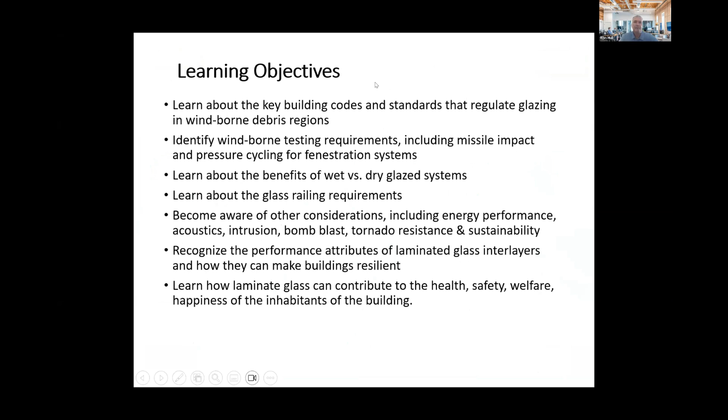The learning objectives today are to learn about the key building codes and standards that regulate glazing in windborne debris regions; identify windborne testing requirements, including small missile impact and pressure cycling in fenestration systems; learn about the benefits of wet versus dry glaze systems; learn about glass railing requirements; become aware of other considerations including energy performance, acoustics, intrusion, bomb blast, tornado resistance, and sustainability; recognize performance attributes of laminated glass interlayers and how they make buildings resilient; and last, learn how laminated glass can contribute to the health, safety, welfare, and happiness of the inhabitants of the building.

Our program topics: first a quick introduction to laminated glass interlayer types. I'm going to go through some building codes, some standards, some hurricane testing requirements, and then talk about wet versus dry glaze systems, and then the other considerations.

Normally during a presentation, I'll pass out these glass samples so you can touch and feel the interlayer. But in general, the PVB is a soft interlayer and the ionoplast is a stiff structural interlayer.

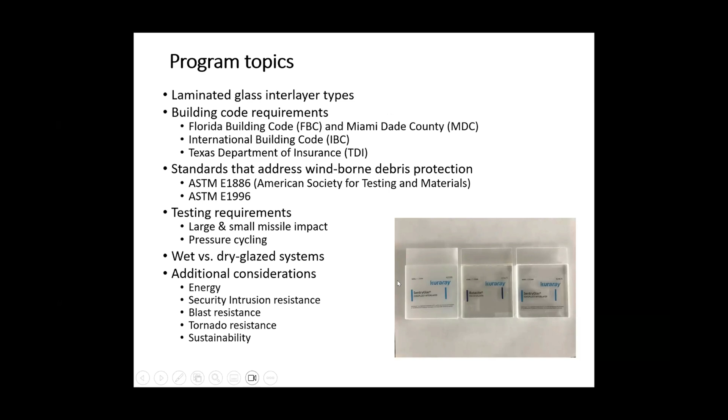There's basically three types of glass. First is annealed, also called float glass. It's great, but when it breaks, it breaks into dangerous shards or splinters, so annealed glass really is not a safety glass.

Tempered glass is a safety glass because it's four times stronger than annealed glass, and when it breaks it breaks into small pieces of glass, so it's less likely to cause injury or cuts. Then there's laminated glass, which can be used with either annealed or tempered glass.

So what is laminated glass? It's simple: it's two or more pieces of glass with an interlayer or a foil, a piece of plastic, in between. The main purpose is to retain the glass fragments to the interlayer if the glass does break, and also to help minimize glass flying related injuries.

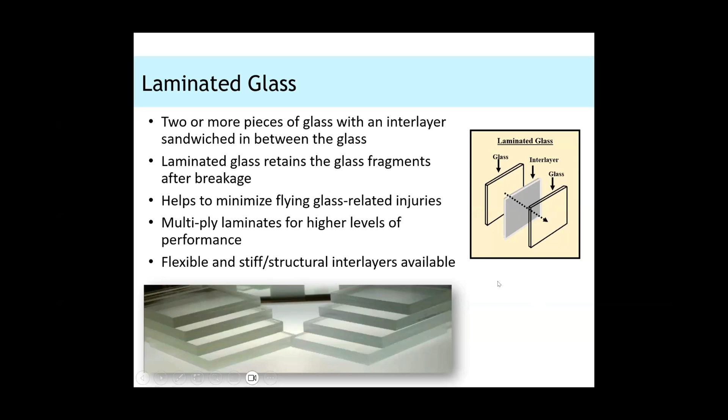Like I mentioned, the interlayers come in both flexible and stiff structural interlayers. The most common interlayer is called polyvinyl butyral, or PVB.

It was first invented in the 1930s for automobile vehicles, because all that was around then was annealed or float glass, which was causing death and injuries during car accidents. So ever since the 1930s, PVB has been inside the glass of a front windshield, and initially all the glass in the vehicle was laminated with PVB.

One advantage of PVB, besides the safety aspect, is it blocks 99% of UV, so your dashboard and carpet won't fade. And then noise reduction: the softer the PVB is, the more sound it will absorb from coming inside the car or inside the building.

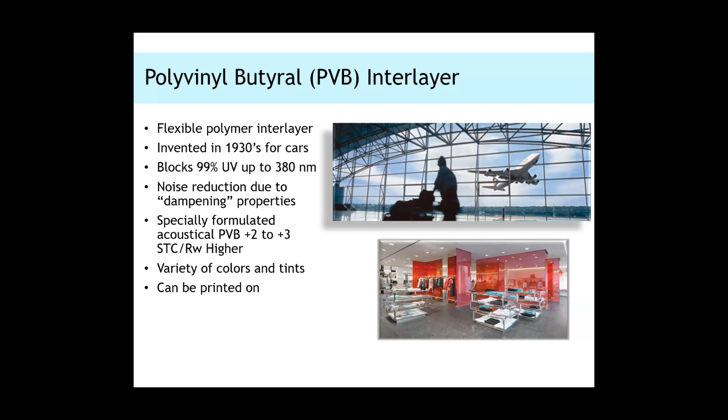In general, just adding PVB to a glass window or door will improve the STC by about 2 decibels. We also have an acoustic PVB that improves the acoustics by 3 decibels in one piece of glass. The PVBs come in different colors and tints, and they can be printed.

Ionoplast was invented in the 1990s, specifically for hurricane windborne debris regions. At the time, PVB was not strong enough to stay in the frame during some of the cycling testing, the high pressure cycling testing.

Ionoplast is 100 times stiffer and 5 times more tear resistant than PVB. It's available in ultra clear and translucent white.

One advantage of it is if the glass has exposed edges to the environment, the Ionoplast weathers very well. We have 25 years of weathering data in Hialeah, Florida, where the edges still look great.

It's also good for post-breakage strength, and I'll show a video on that. Like PVB, it blocks 99% of the UV, and then it has excellent properties for the structural glass market.

What's the difference between hurricanes, cyclones, and typhoons? There's really, I couldn't find any differences, but it's just where you are in the world that determines what you call it. If you're in the Americas, we call it hurricanes. If you're in Southeast Asia, India area, you'll call it cyclones, and then I guess you call it typhoons if you're in Western Pacific and China. This year, the reason I'm showing this chart is I gave a presentation in Australia and in China where there are typhoons, and I had to keep changing my terminology from hurricane to typhoon.

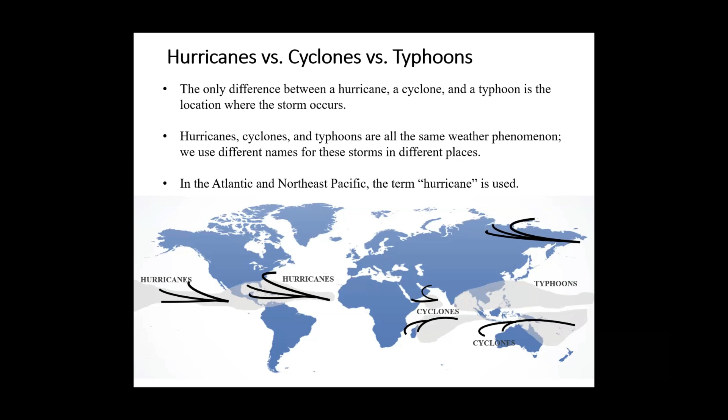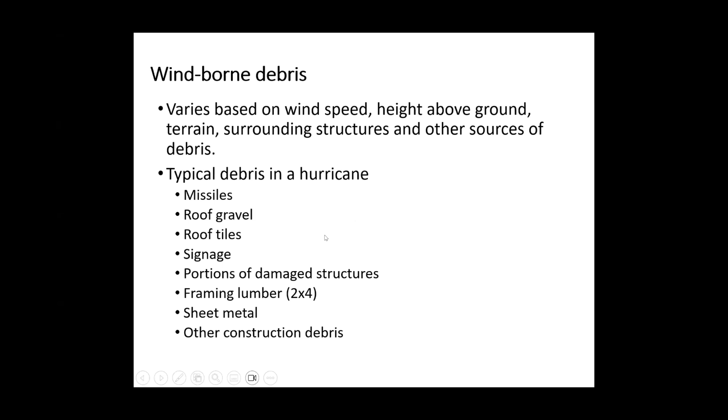What is wind-borne debris? It's really anything that's on the ground or on a building that is light enough to be flying in the air. And I'll show one video.

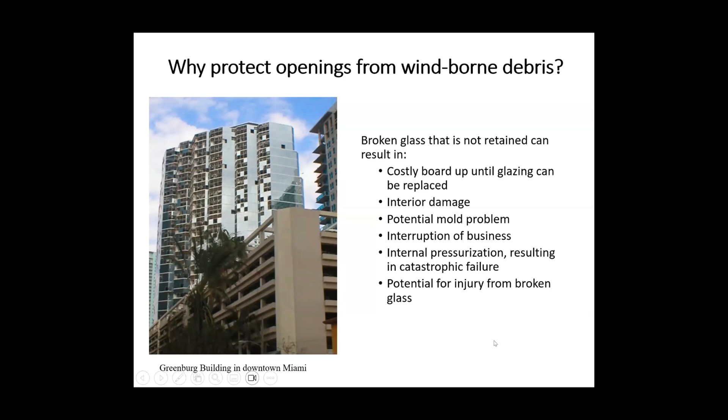So what happens is when you get air and water into the building from a hurricane or a storm, first of all you have water damage in there, which could cause mold. If you're renting the building, you're not going to be able to rent it until it can be renovated. So this is one reason why we have new building codes.

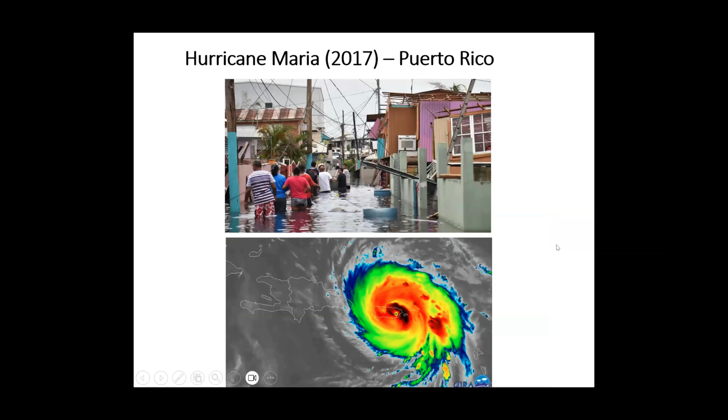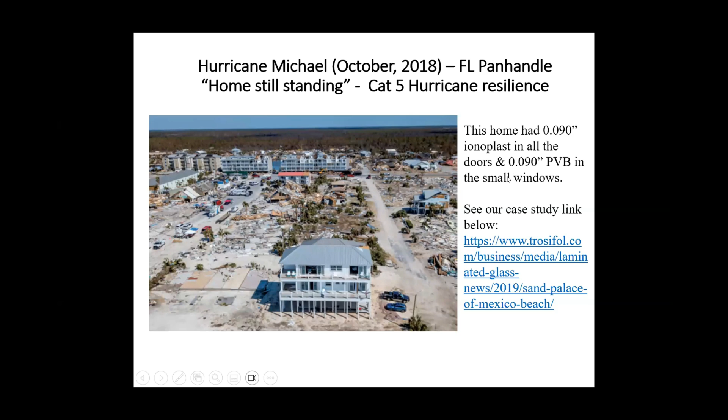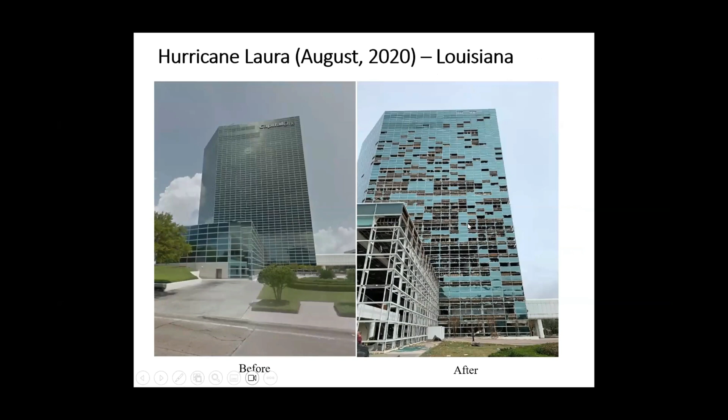Here's one in Louisiana. This on the left is the building before the hurricane, Laura, and on the right is after. You can see that after the hurricane it kind of looked like the building in South Florida from 1992.

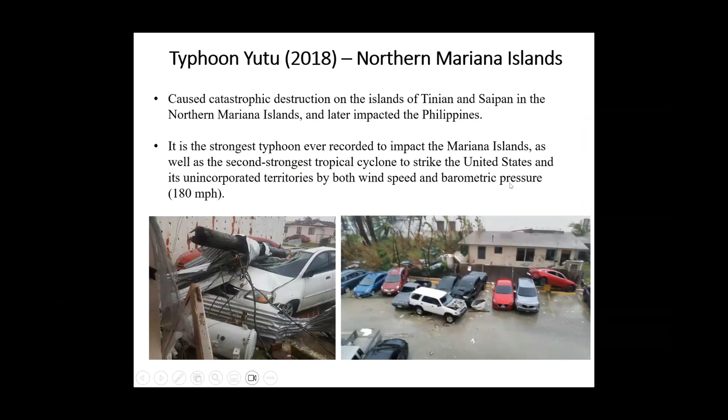Here's some more pictures from that storm.

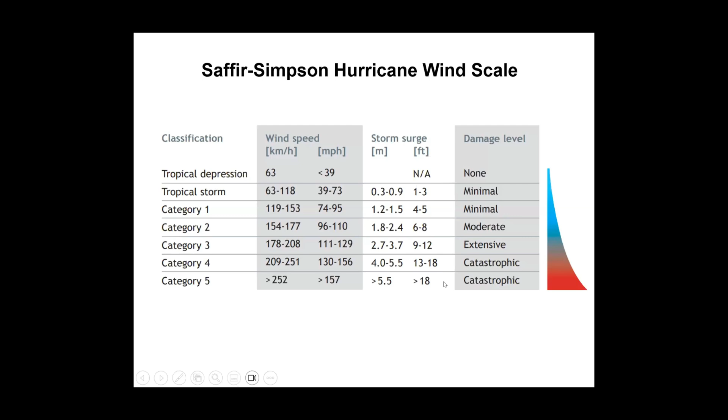Just think that at one time, Milton, which just hit Florida recently on the west side, when it was in the Gulf of Mexico, had sustained winds at one time of 180 miles an hour. So there's actually been talk about adding another category because we're seeing much higher sustained wind speeds than 157 miles an hour. I think what's even more important is you look at the storm surge. There's really no storm surge for a tropical depression, but the storm surge for Category 5 could be greater than 18 feet. And that's really what hit Fort Myers about 2 years ago.

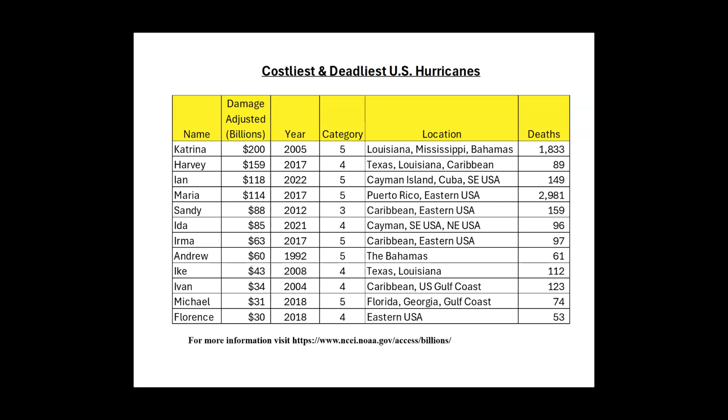And then looking at damage, you had Harvey, Ian, and Maria all well above $100 billion in damage. And then in terms of deaths, Puerto Rico had the most, 2,981 from Maria.

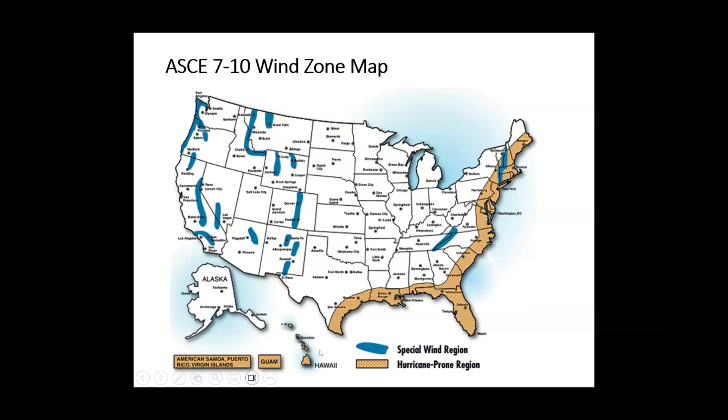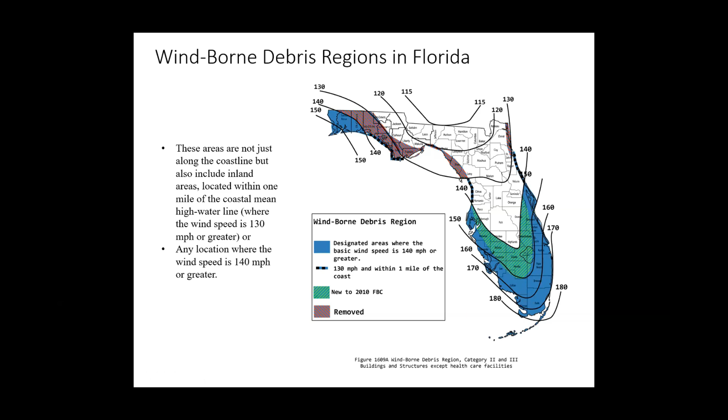And then here's the Florida wind debris regions. As you all know, South Florida has the highest wind zones. And actually if you look far west on this map, the Panhandle, you have some pretty high winds as well. FEMA, who's really involved in the aftermath of the hurricanes, also has their own wind zones, and their category wind zone of 150 miles an hour includes Broward, Martin, Miami-Dade, Monroe, and Palm Beach counties.

Okay, now moving on to building codes. I do see one question - oh yeah, so I forgot to mention that. The building that I showed in Lake Charles, Louisiana, it actually imploded and is no longer there. So thank you, anonymous person, for noting that.

Okay, so in Florida, the main building codes are Miami-Dade and the Florida Building Code. The rest of the world, except for Texas, uses the International Building Code. So if you're in parts of the world where Miami-Dade, Florida, and Texas codes don't apply, the IBC really regulates any area where 130 mile an hour wind zones or higher occur.

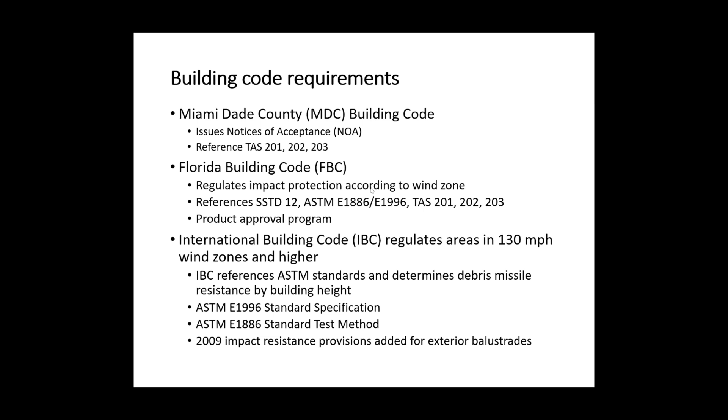So Miami-Dade has its own standards, TAS 201, 202, and 203. Once a product manufacturer has passed all the testing requirements and paperwork, they are issued a Notice of Acceptance, or NOA. Florida Building Code does reference Miami-Dade, but it really uses ASTM standards, E1886 and E1996, and you get a product approval from the FBC instead of an NOA from Miami-Dade.

So Miami-Dade, as I mentioned, TAS 201 is the small and large missile impact testing standard. 202 is air, water, structural testing. And 203 is the cyclic pressure test. Like I mentioned before, you get an NOA once you've passed all the requirements. ASTM 1886 is the test method for hurricanes, and 1996 is the standard specification for performance.

Okay, so what's the difference between TAS and ASTM? Well, TAS definitely, in my opinion, is more difficult to pass, and there's three reasons. One is the large missile impacts the specimen twice, where with ASTM you only have to impact the specimen once. The pass-fail criteria are similar - no penetration or opening larger than 1/16 of an inch by 5 inches. However, ASTM says, or an opening through which a 3-inch sphere can freely pass. And then the other difference is for Miami-Dade, the missile has to impact the mullion, at least one mullion, where for ASTM that's not a requirement.

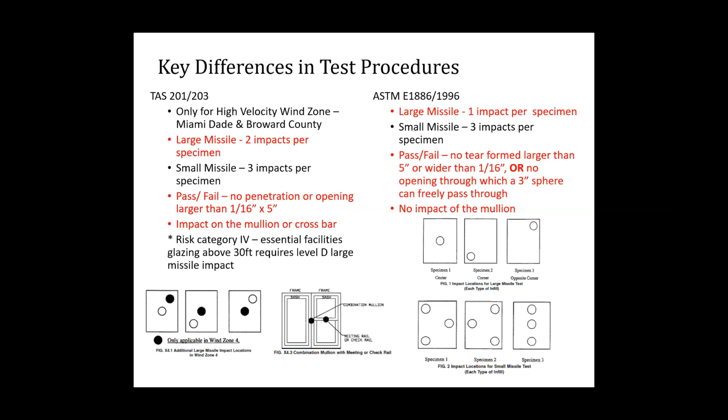So looking at this from ASTM, the first thing to note is the first 30 feet of the building is where you have large missile requirements. That's mainly because a large missile like a 2x4 probably isn't going to fly higher than 30 feet - it may, but it may not. But lighter missiles like gravel or anything lighter may fly higher than 30 feet. So we call that small missile. That's a little background on that.

And then when you're looking at designing a building, you have to look at many things. One is, what wind zone are you in? And what level of the building you're designing to, and whether or not it's an enhanced facility or just basic protection. So for example, if you're in wind zone 4 and you want enhanced protection for essential facilities, the first 30 feet of a building needs to be level E, and I'll cover that in a minute.

And here's some of the buildings that fall under essential facilities: hospitals, healthcare, police stations, emergency shelters, jails, detention centers, etc.

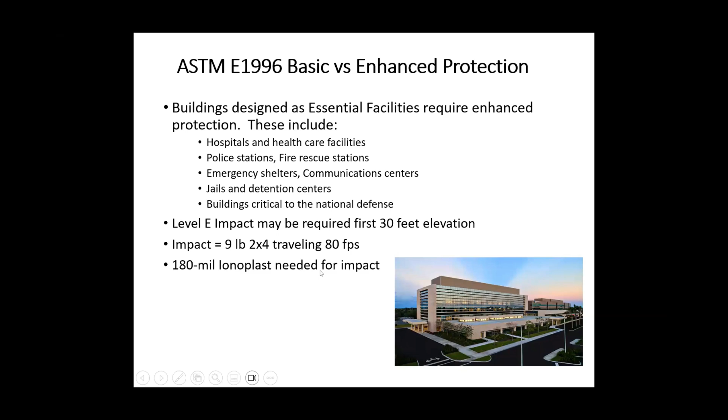I think most people test the first 30 feet of a building to level D, which is a 9-pound 2x4 going at 34 miles per hour. If you're an essential facility, you've got to test level E - same 9-pound 2x4, but the missile is going 55 miles per hour instead of 34.

Once again, this is just general guidance. If your design pressure is 80 PSF or less, and your window or door size is less than 30 square feet, then PVB should work. When your design pressure is higher or your glass sizes get bigger, that's when you need to consider using ionoplast, because the PVB will pull out of the frame during the cycling test.

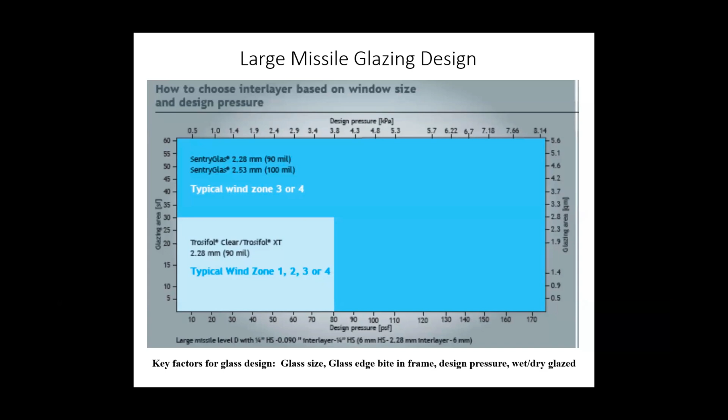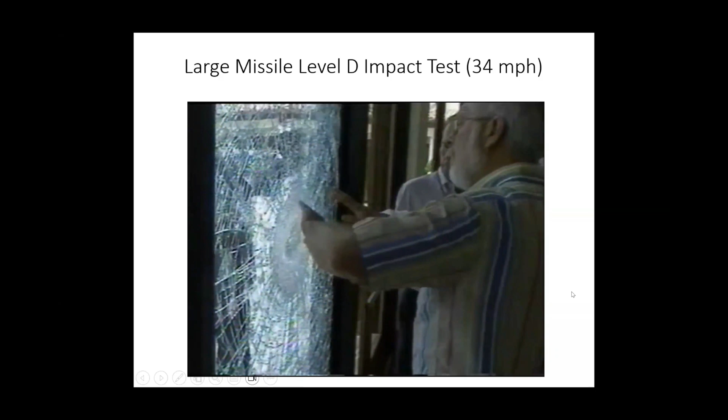Okay, you've probably seen this before, but this is the level D large missile impact test, the 9-pound 2x4 going at 34 miles per hour. The objective is to have really no tear when the glass breaks, and none of the glass comes out of the frame during the impact.

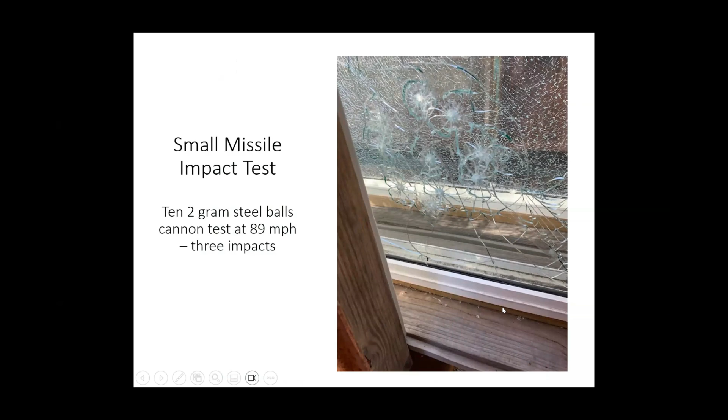Okay, the small missile test is, like I said, 10 2-gram steel balls shot out of a cannon at 89 miles an hour. You do 3 impacts. There's a picture just showing what it looks like after the steel balls hit the glass.

You've got to get with normally an engineering firm to determine what pressures for each of these different cycles. But basically, you've got to cycle the glass 9,000 times and have none of the glass pull out of the frame.

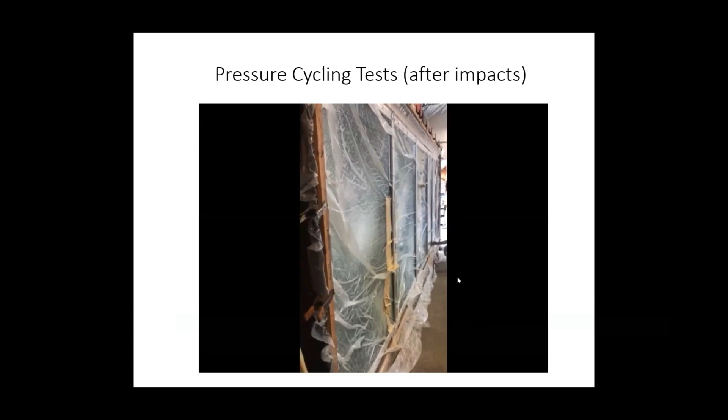So here's a sample of the cycling test. So you have the glass already broken. Now you have the system attached to the wall, and there's a pressure being pulled from the wall, and the glass is deflecting.

So this is FM, Factory Mutual, and ANSI standard 2510 is one of the main standards to look at. FEMA also has a standard for floodproofing, but this is a big trend we're seeing - to have not only a hurricane-resistant system, but also a system that can withstand flooding.

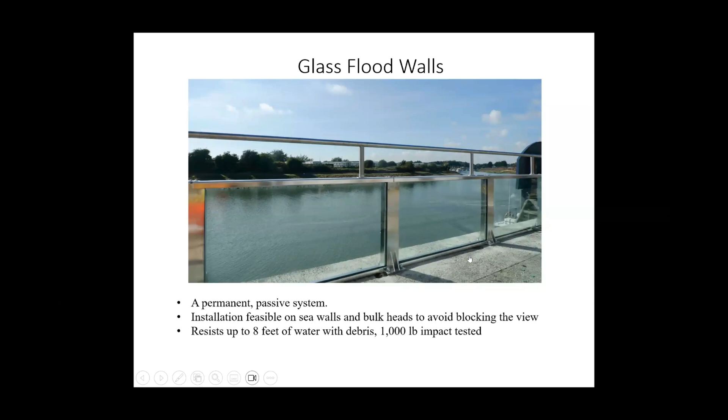So this is an example of a passive system. It actually looks like a glass railing. This is along a river - in the city they installed this. This is actually a flood barrier, where if the river does crest and goes above the ground level, then now you have, instead of sandbags, a permanent structure here to prevent the water from coming farther inland.

Okay, I see a question. Does Broward County still have requirements more stringent than Dade? I don't think so - I think Miami-Dade includes the 3 counties. So, no, I do not believe so. If someone else has some newer information, let me know, but I don't think so.

All right, so for glass railings, very popular in Florida and in the hurricane region - before 2015, all glass railings typically were tempered glass. Because tempered glass sometimes spontaneously breaks, or it might just break from an impact and fall off a building, the International Building Code decided to change the glass railing specifications from tempered to laminate glass. So this all started in 2015 with IBC.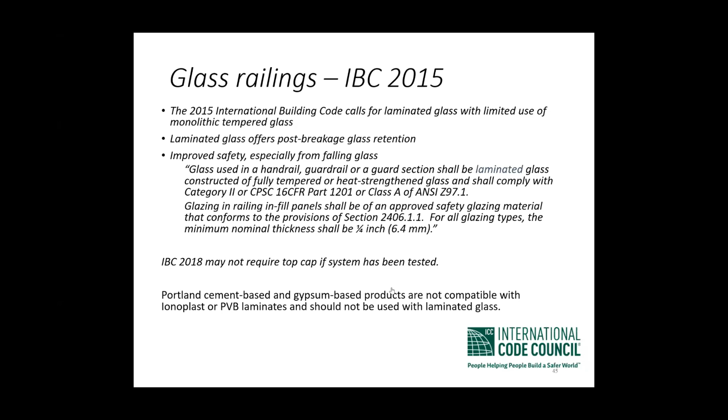So I want to show a quick video. In this video, we're going to show a glass railing, one-side supported, only supported in the base or the shoe. And we're going to test tempered glass with a stick-on film, laminate glass with PVB, and laminate glass with ionoplast.

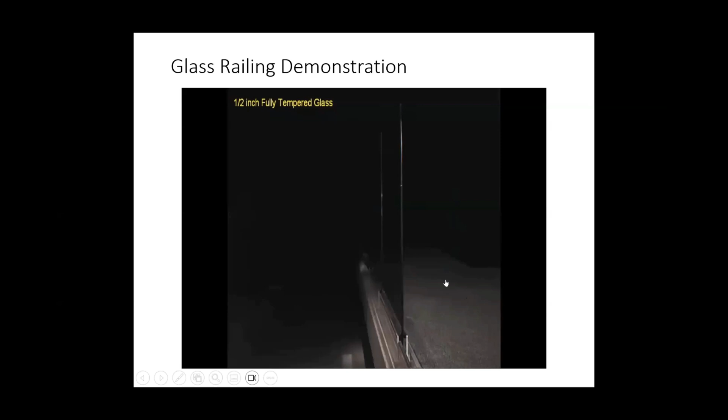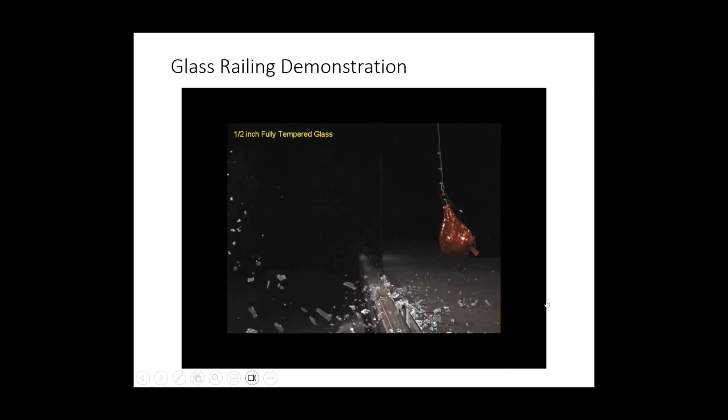So this is tempered glass. This is what tempered glass looks like when it breaks. Here's another angle of the tempered glass. So see, it breaks into small pieces, which is nice.

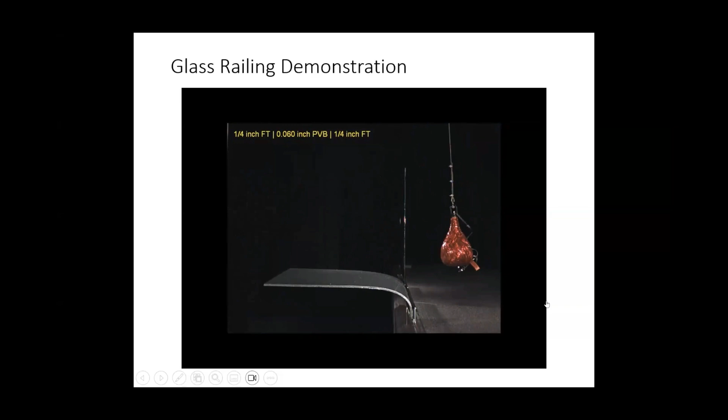Here's an applied film, stick-on film. All it really did here was keep all the glass together. Here's PVB. See, almost no glass falls onto the sidewalk, but the glass falls over like a wet noodle, so if there's a child up there, they could easily fall off. Here's the ionoplast. See, the glass does break, it deflects, but then it just pops back in place, so it can be a barrier until you get the glass replaced.

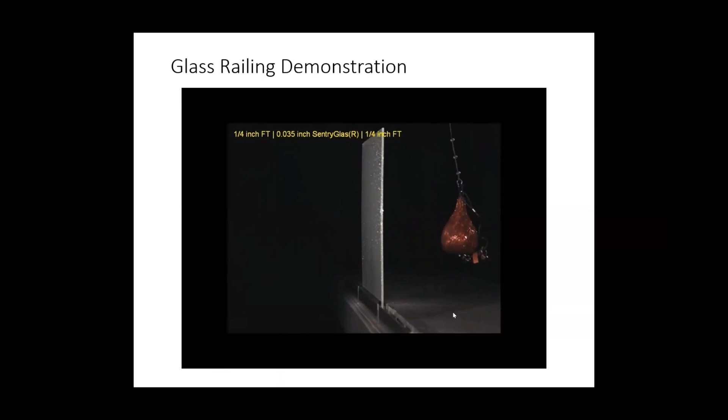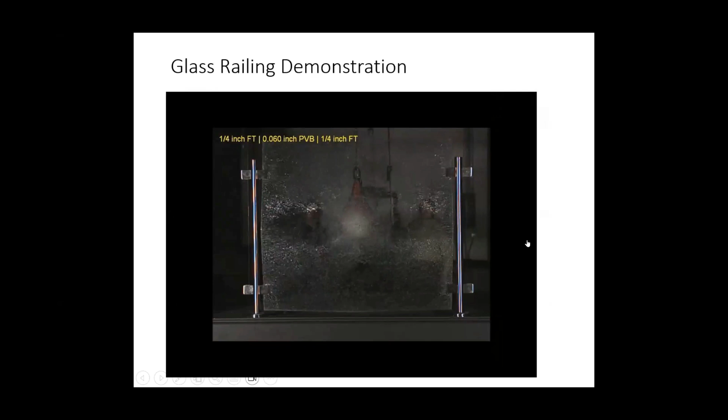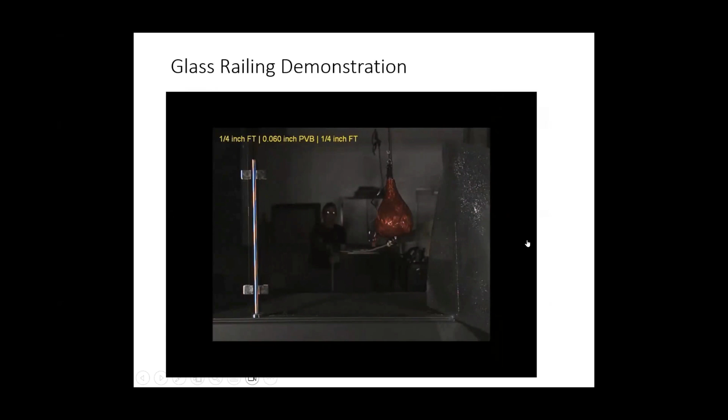Okay, here's another popular design, I just want to show this one. So this is once again tempered glass. In this case, this railing is only supported by the 4 points. Here's the applied film, stick-on film. Here's the PVB - see, the PVB eventually does fall off onto the ground. And then the ionoplast is next. We actually were able to hit this 10 times and the glass stayed in the frame. So this is what we call post-breakage strength.

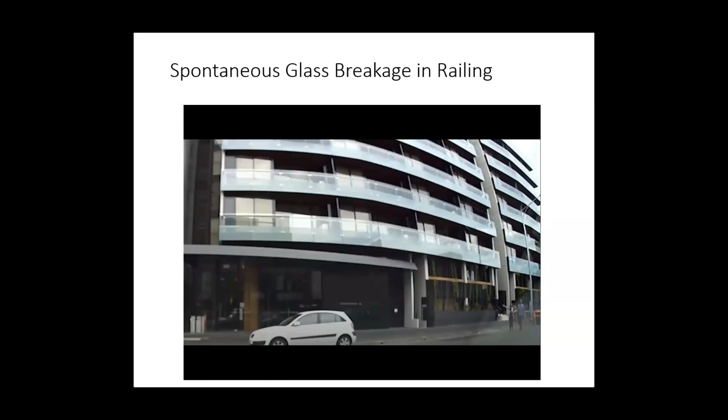Now I mentioned something called spontaneous glass breakage. So this was a security camera on the street that just happened to catch this glass railing breaking. If you look up top in the video when it comes out, see the glass railing, the glass just broke for no known reason.

Now there is something called nickel sulfide inclusion. It's an impurity that's sometimes in the glass, and when the glass is tempered, it can spontaneously break if there's too much of this nickel sulfide inclusion in there. One way of preventing this - it's not guaranteed - is you can heat soak the glass after you temper it. But this is one reason why glass railings are now laminated instead of tempered.

Okay, so next, certification. So Miami-Dade - if you're a window door company and you pass all the testing, get all the paperwork done, meet all the requirements, you get issued an NOA. You can actually go onto Miami-Dade's website or the state of Florida's website and look at all the NOAs and product approvals that have been tested. It's a really, really good system, and in my opinion it's pretty user-friendly as well.

And then the Texas Department of Insurance has its own requirements for windstorms. In some cases, if you've done all the testing to meet the state of Florida or Miami-Dade requirements, then Texas will allow it to be used without additional testing. In case you do need designing in Texas, it's basically the coastline of the entire Gulf Coast of Texas.

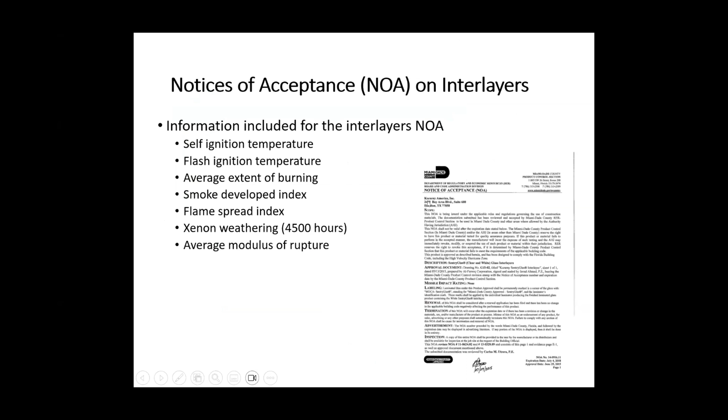I mentioned, here's just a sample of the websites where you can go and pull up any NOA or product approval that's been tested. And here, since we're a product manufacturer, in Miami-Dade we also have to have an NOA. So this is a sample of what our NOA looks like and some of the testing that is required. In the state of Florida, we're not required to have a product approval - that's only for Miami-Dade.

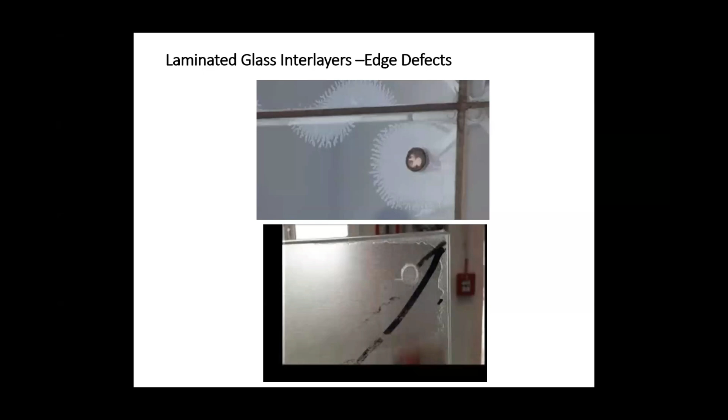Okay, so one of the issues with laminated glass that you should be aware of - unfortunately this is not common - is delamination, where the glass is separating from the interlayer. The picture on top looks like a point-supported system. You can see around the point there's something that looks like a white star - that is the glass separating from the interlayer. And above that, where there's structural sealant, you're seeing delamination as well. The bottom is a piece of glass showing delamination on the edge.

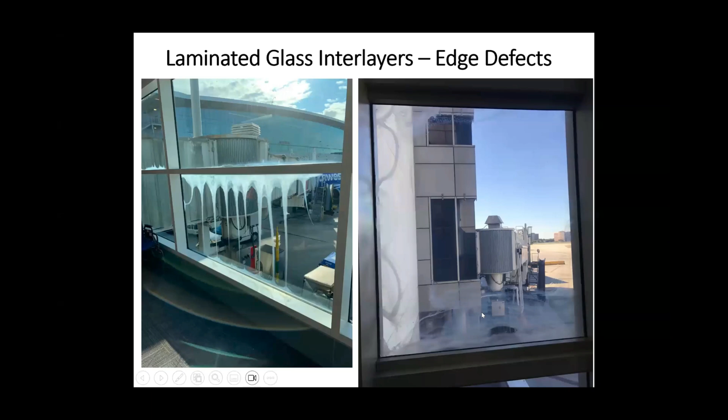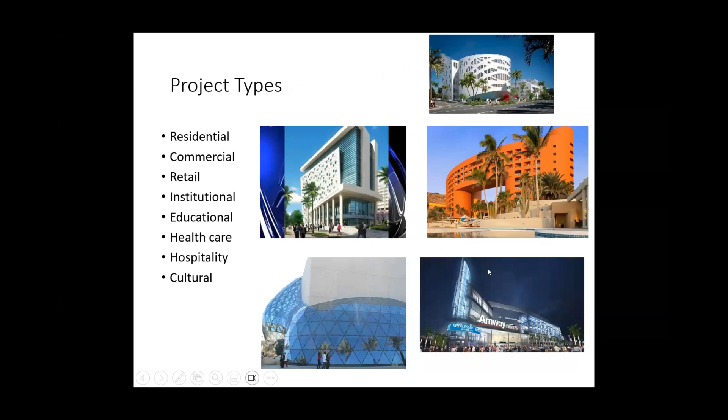Now talking about some project types. There are many I'm going to cover coming up, but first I want to talk about wet versus dry glaze systems.

A wet glaze system is pretty simple. If you're outside of Florida, normally a window or door's glass is installed with a gasket. But in the hurricane testing, the cyclone testing, you want that glass to stay in the frame. So one way to keep the glass in the frame, especially with PVBs, is to have a sealant that basically glues the glass to the frame. Whenever a sealant is being used, it's called wet glazed, and when there's no sealant, it's called dry glazed. That's an easy way of saying it. One advantage of a dry glaze system is if the glass breaks or has to be replaced, you don't have to dig all that sealant out of the frame. You just remove the glass, remove the gasket, and put a new one in. There are some systems actually, because of the stiffness of ionoplast, that are dry glaze for the hurricane regions.

I see another question. Okay, I'll stop here. Is ICC 500 wind zone of 200 miles an hour can work with level E?

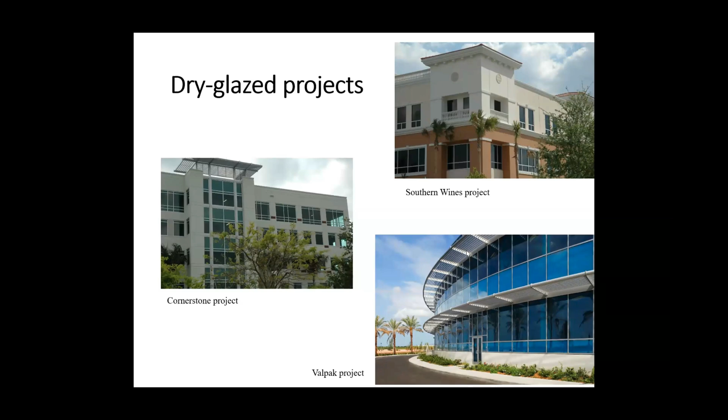Okay, thanks for the questions. Next we're going to talk about some other considerations.

First, energy. I know some other glass companies talk about this, so I'll be very brief. There are really two main things I think most people look at when it comes to energy performance. One is solar heat gain, which is preventing heat from entering the building. Normally a triple silver coating is put on the number 2 surface of the glass that will reflect the heat from entering the building. That's probably the most common. Then there's also U value. U value in Florida, at least South Florida, is not as important as maybe up in Canada or the Midwest, but it's very important when there are cold temperatures. In terms of these two energy variables, our interlayers really only help with UV, blocking the UV. We have thought about adding some interlayers that reflect heat. I don't think our interlayers could ever help with U values, but that's something we have to consider. Today, I think the number one solution in Florida to lower solar heat gain is a low-E coating on the number 2 surface.

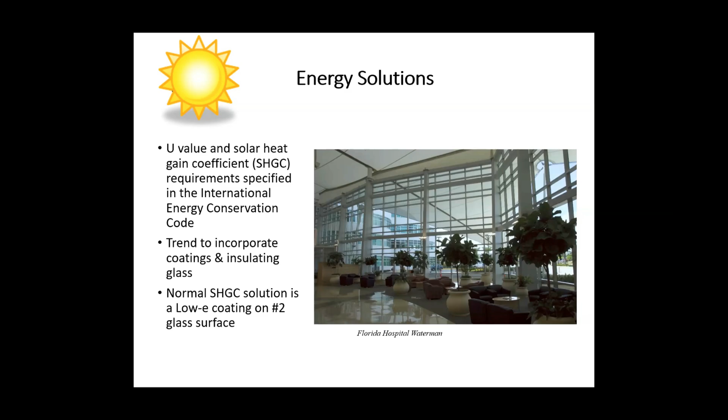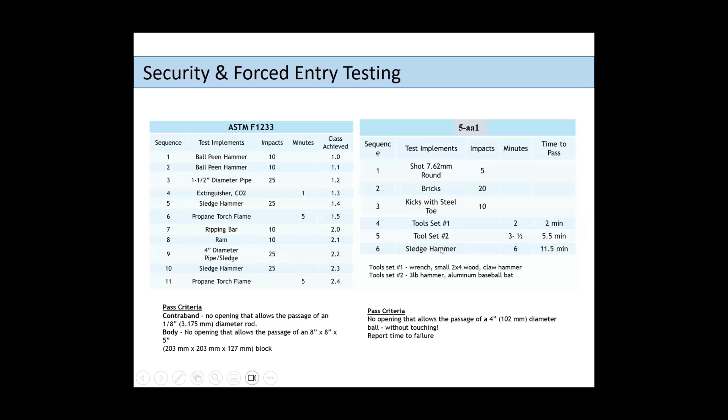Okay, there's many tests you can do for security and forced entry. ASTM F1233 is a popular one, and then 5-AA1 is another. Basically, you start with a bunch of tools and try to break through with one tool. If you don't, you go to the next tool, and next. In some cases there's a fire extinguisher, a flame torch, and sometimes in these tests you can actually shoot the glass first with a bullet. The bullet goes through, and then you try to do the testing. I'll show you an example of that.

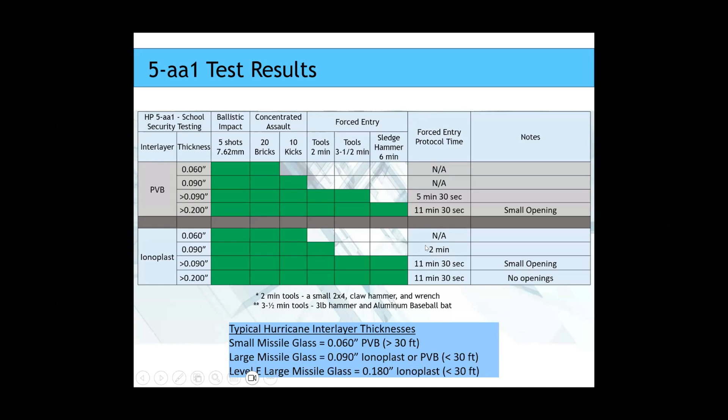We have a lot of information for the different tests. This chart shows the 5-AA1 test, showing how far the glass survived. We did different thicknesses of PVB and ionoplast. In general, the ionoplast, because it's stronger and more tear resistant, lasts much longer in testing for the same thickness. If you look at 60 mil PVB, or 1.52 millimeter PVB, that's what's normally used in a small missile test — it didn't perform very well, it didn't even make it through the brick test. But a level D glass system with 90 mil ionoplast made it through the brick test, the kick test, and the tools. And a level E system with 180 mil ionoplast survived all the testing. It was very impressive, and I'll show you a video on that.

The last test I want to mention: in 2022, ASTM came out with a test specifically for school security. Before this, school security testing was just using other tests — there really wasn't much consistency on what test was being used. Basically it incorporates 10 rounds of a 5.56 millimeter gun shooting through the glass — so this is not bullet resistant glass — and then you try to break through the glass with a standard device that tries to penetrate it.

We've done a lot of testing for this with different interlayers. In the testing for school security, there are 8 levels — level 1 is the lowest, level 8 is the highest. What we found was that, in general, the thicker the interlayer, the better the performance, and the ionoplast performs better than the PVB. For example, if you used ionoplast with 90 thousandths, large missile level D with 3 millimeter glass, you'd achieve a level 6. But with PVB at the same thickness, you'd only be at level 4.

Here's a test that we performed. The glass was shot 5 times with an AK-47, and then many different tools were used to try to break through. On the left will be PVB, and on the right will be the ionoplast.

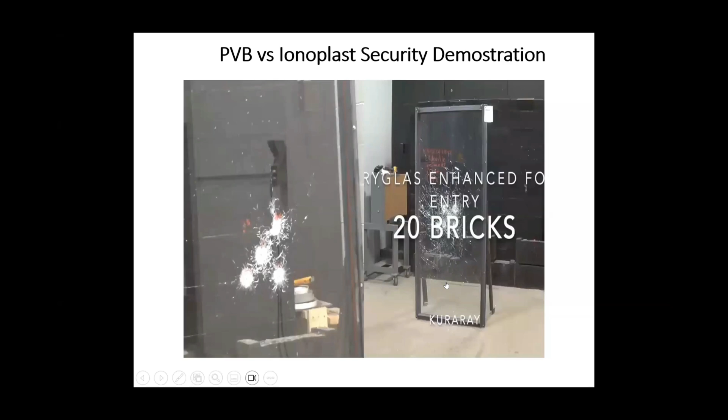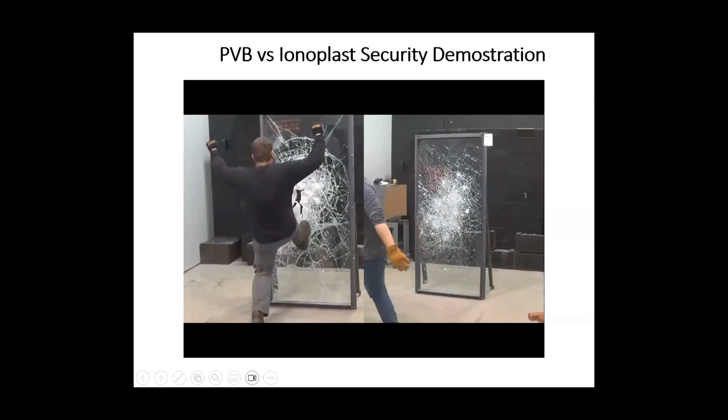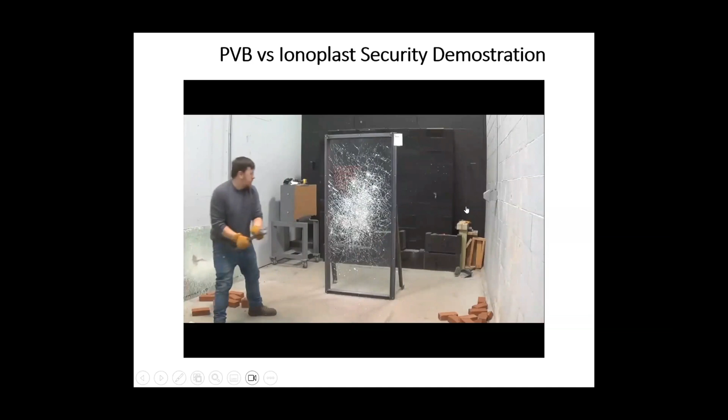On the left, the PVB is already torn. Eventually the PVB does go. Switch to the wrench. Switch tools.

This is 11.5 minutes. Kind of tired. The owner of the test lab joked that these people were in a stress management program — I think he was kidding.

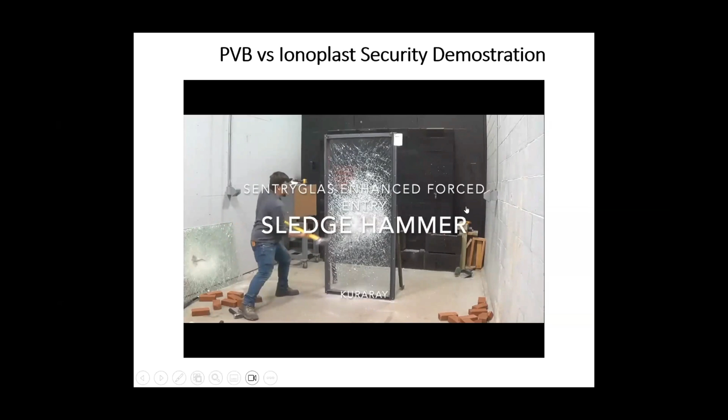But anyway, the glass you're seeing here is actually the 180 mil ionoplast that's used for level E impact, or for essential facilities. I'll stop there.

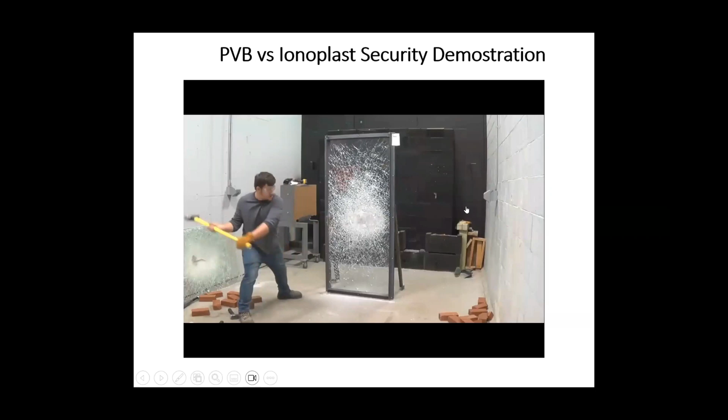Okay, so some questions about tornadoes, ICC 500. There are 6 levels or categories, EF0 up to EF5. EF5 is 200 miles an hour.

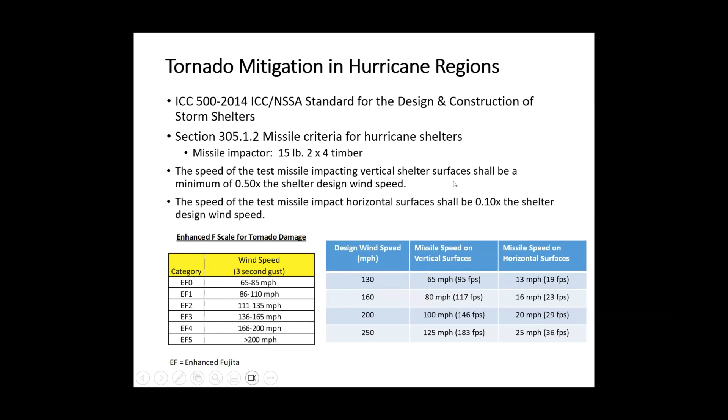This chart shows the difference between hurricane missiles and tornado missiles, both the missile type and the speed. So once again, level D, large missile, the 9-pound 2x4 going at 34 miles an hour. Once you start doing the FEMA ICC testing, the missile becomes a 15-pound 2x4 instead of 9, much heavier and bigger. The lowest level tornado was 80 miles an hour, and EF5 was 100 miles an hour. So it's a 15-pound 2x4 going 100 miles an hour.

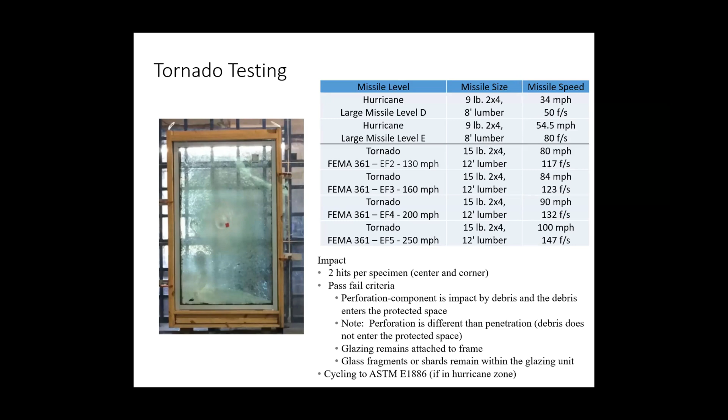It's really amazing to watch this testing compared to watching the hurricane testing. So we tested with a few system manufacturers. I mentioned Collier being one, Winco another, and I think we did testing with West Tampa Glass. But here's our recommended solutions for the different EF levels.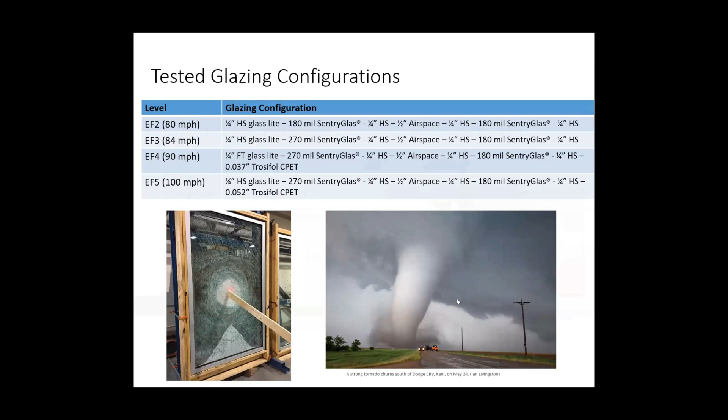Hopefully this video works. This is an actual test, the EF5 test in slow motion. We did it in slow motion because you see what happens to the 15-pound 2x4 when it hits the corner of the glass. Basically, the 2x4 turns into a bunch of toothpicks. The first time I saw this, it shocked me how much damage there was. The good news is that there are already some commercial systems available for the different levels.

Next, I want to talk about bomb blast. Bomb blast is mainly used in government buildings, federal buildings. We do a lot of work with the U.S. Department of State and the GSA. For GSA level C, it's a 4 psi peak pressure, 28 psi milliseconds. DOD is 6 psi, and GSA level D is 10 psi, 89 psi milliseconds. So a lot depends on how good of a barrier you can have around the building, because the closer you are to the building, the more destructive the bomb is going to be.

We did a lot of testing in the past at a test lab in West Texas where there's nothing around. An actual bomb is ignited, and you see how your system is tested. But today, most people use in a test lab this bomb blast simulator.

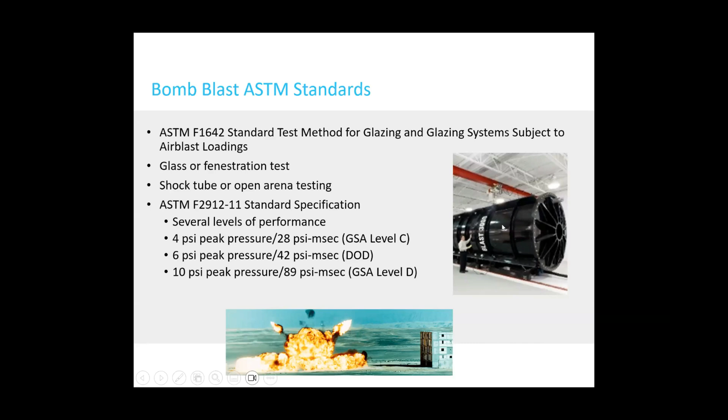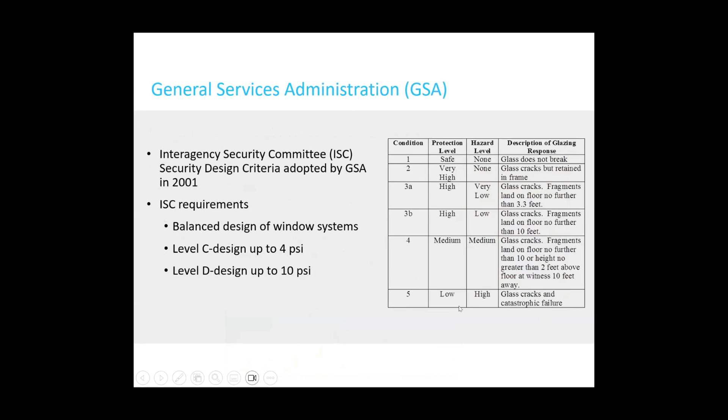Next, I want to switch over to structural glass. Let me see, there's another question I think. The question is, is testing different than the Texas required testing?

No. In general, I think most people that I know that got their systems approved in Texas tested either to Miami-Dade or to the Florida building code, and then they just shared the test results with the state of Texas, and then had to fill out the state of Texas paperwork. So there's not a separate test for Texas, but there is different paperwork for Texas.

The next question: is there a best option for single family residential, or are there existing residential window manufacturers incorporating the ionoplast interlayer? I'd say in general, most system manufacturers use PVB when they can because it's less expensive. But whenever the glass sizes are big or the design pressures are high, that's when ionoplast is normally used.

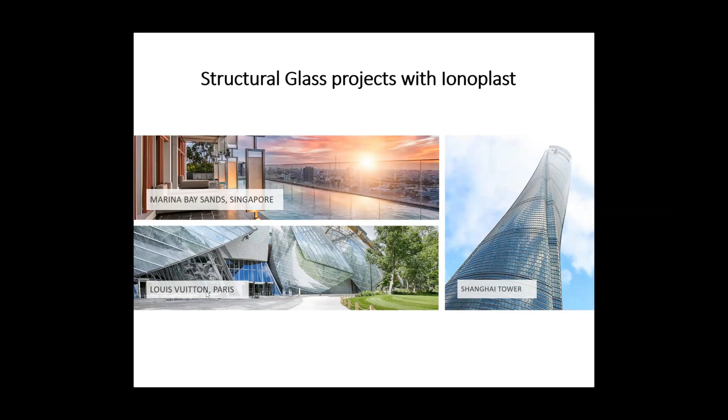But if you're ever in Singapore, the Marina Bay Sands, very nice. In Paris, there's the Louis Vuitton headquarters, and the Shanghai Tower in China.

The company that really started the structural glass revolution was Apple. For their stores, they had nice openings like the Cube, glass stairs, glass floors, glass railings. On the bottom right is the Amazon building in Seattle.

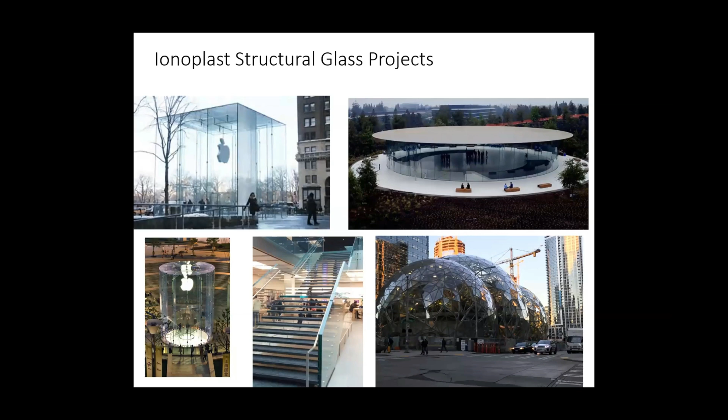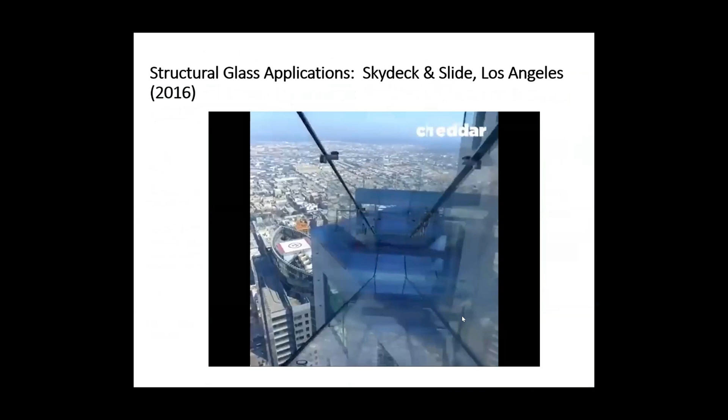But here, someone decided to put a glass slide on top of one of the tall buildings in Los Angeles. I'll show you a quick video. So this is all structural glass with ionoplast. It's actually pretty scary if you're afraid of heights.

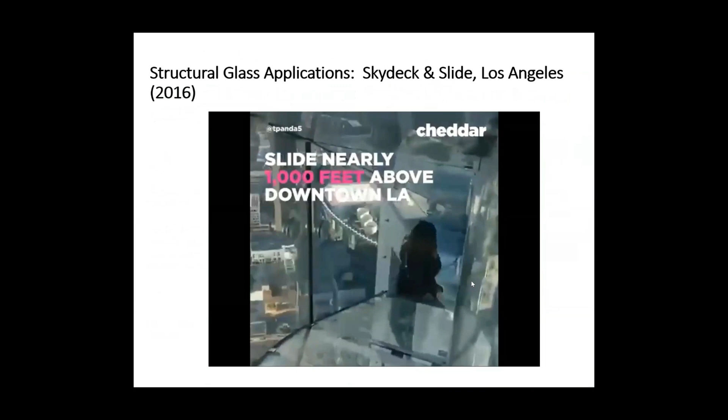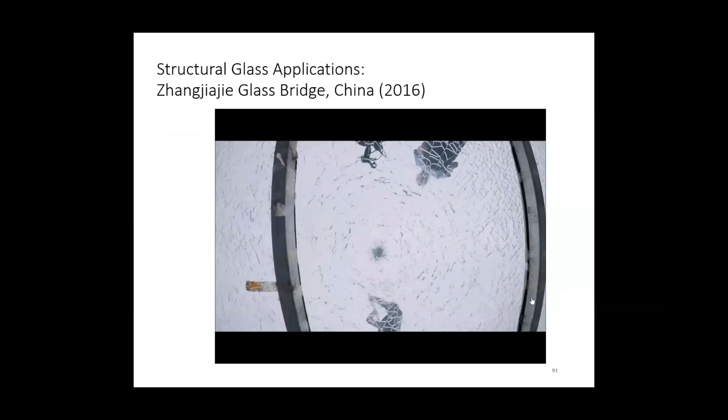The owners decided to break the extra piece of glass on top of the bridge just to show you how strong the glass was. So even if the glass did break, you would be safe.

And then here's a nice project in Bangkok. So we're starting to see these observation decks, these glass floors all over the world.

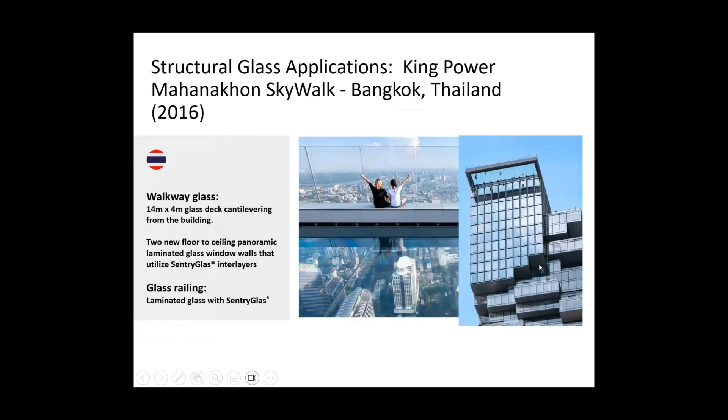Okay, next is sustainability. Like most companies, we have sustainability goals to get to zero by 2050. Our company recently completed our EPDs for our PVB and ionoplast interlayers.

I want to talk about structural glass. With ionoplast, just using the same interlayer thickness, you reduce your carbon by 19%. But because of ASTM E1300, structural engineers can design the glass to actually downgauge it.

So let's say you have a glass railing that requires 8mm glass. With PVB versus being able to get by with 6mm glass with the ionoplast, you can actually reduce the carbon footprint of the glass itself.

With structural glass, you can eliminate some of the framing as well. And also when the glass is lighter, you don't need to support as much weight in the building. But I'll show you an example of this.

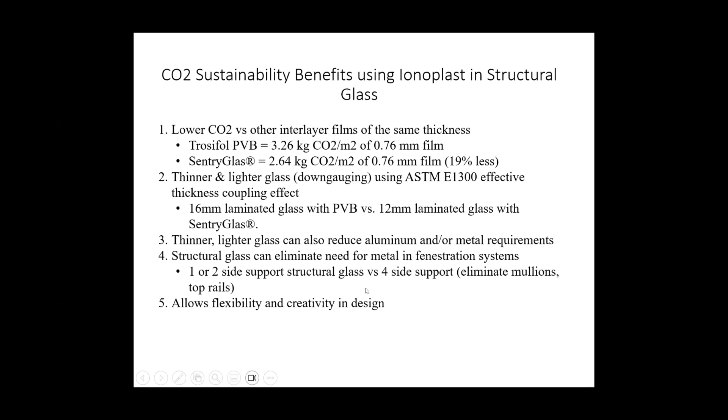This is the Shanghai Tower, the third tallest building in the world. They decided to use structural glass with ionoplast instead of PVB for the whole building with a double wall, and they were able to reduce the carbon footprint by 20% just by switching the interlayer.

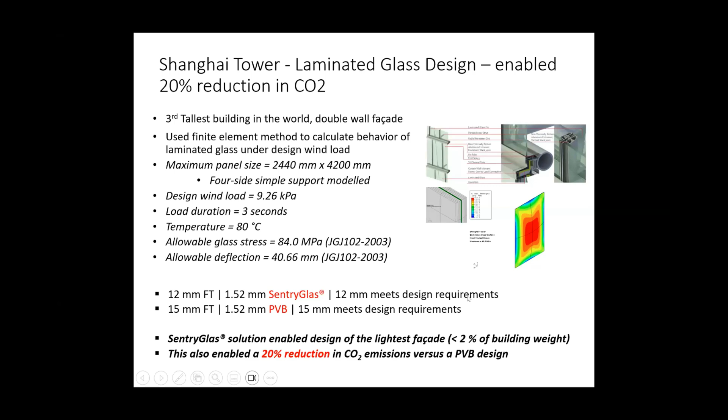And here's an example of a glass railing where switching from PVB to ionoplast, you're able to reduce the carbon footprint by 24%. And I mentioned with structural glass, you can get by with less framing.

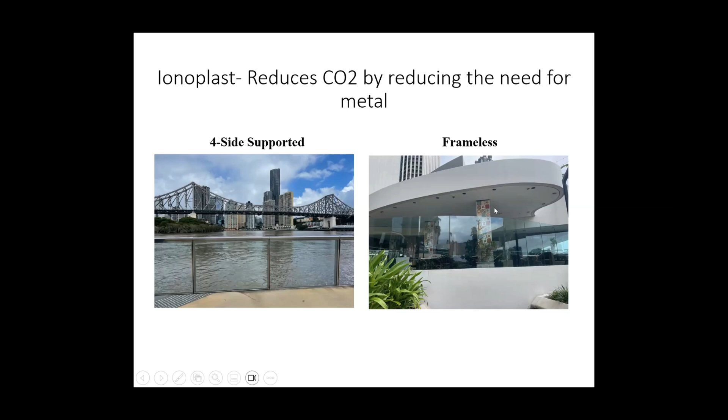The picture on the left is a four-side captured glass railing with metal, and there's another picture with no framing, only supported at the base. So in this case, you're using less metal, and less metal means lower carbon.